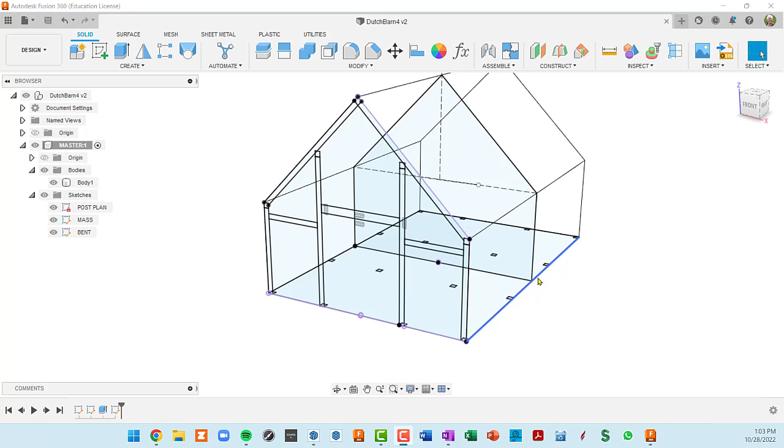We have a master component, and inside that master component is a single body, which is currently transparent because we set its appearance to air. And we also have three sketches. The one on the bottom here is a post plan. So that's where all our posts will exist. And this defines the outer dimension of the building. The second sketch we made in the center of the building and used to extrude this body right here. And then the third sketch was kind of an outline of the bent timbers, which we're about to draw.

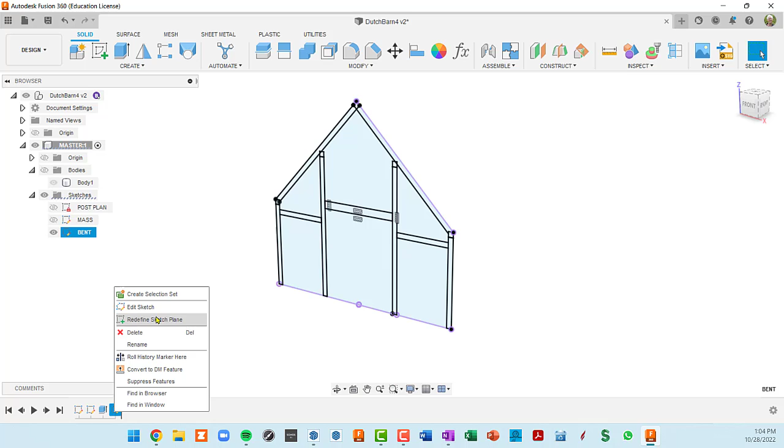Now, one thing I noticed when we did this last sketch, we did some projections, and that's what these purple lines are. If that bothers you, we can go back into the bent sketch, either by double-clicking here, or by finding it in the timeline, which is right here, and right-clicking and editing the sketch there. There's also a third way to do it. If you right-click on any element in the sketch, you can edit a sketch.

So I'm just going to go to the Sketch Palette dialog box, turn off the projected geometries, and for some reason this line drops out. So I'm going to get my line tool and then just draw this line back in, finish our sketch, and then we take a look at it from the front side, and that looks good.

Okay, so the very first thing we want to do here is create another component. So we have everything inside this master component. It's very convenient. We can hide it and show it. But we want to be able to do that for the first bent as well. So if I was to create a new component with the master component activated, which is what this little fisheye is right here, the new component would go inside or below this master component. That's not what I want. I want it on the same level.

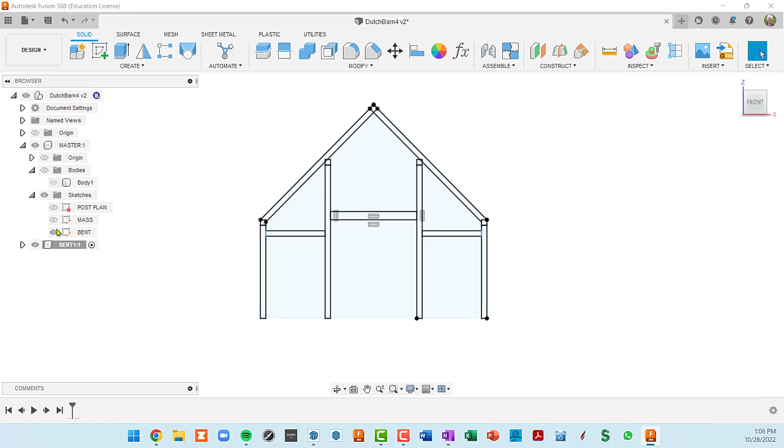So the very first thing I need to do is activate the top level component and then create a new component. So I will call this bent 1. All right, and now we can do sketches inside that, or even create other components inside that. So let's go ahead and show our post plan from the master component, and we can move around here, but our bent 1 is still active.

Okay, so what we're going to do is we're going to make some posts here. And I tell you what, let's also turn on our bent plan. Okay, so that's going to be a nice guide as to where all of our stuff is going to go. All right, so to extrude a post, all we have to do is select this profile and then use the extrude feature. So I'm going to click there. I'm going to go up to extrude. So when the dialog box pops up, it shows we've already got a profile selected. If I hadn't pre-selected that profile, or if I kill it now, I can go back in and select it.

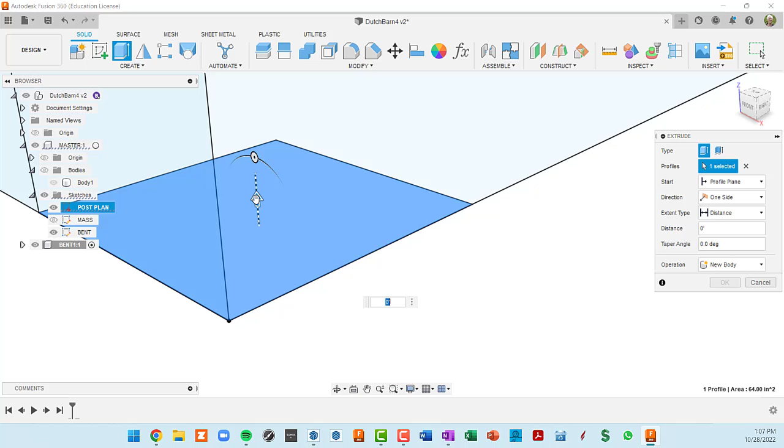Okay, so the arrow, the extrude arrow, is pointing upward. So if we pull that, we see the beginning of the extrusion. We want to be able to go up to this line. So if we pull this up, we can kind of see where we're at here. Unfortunately, I don't know of a way to snap to that line. You can snap to other bodies, but let's give it a try here. Let's see. If we don't set the distance, we want to go to an object instead of a distance. So will we be able to select this object? I don't see a way to do that.

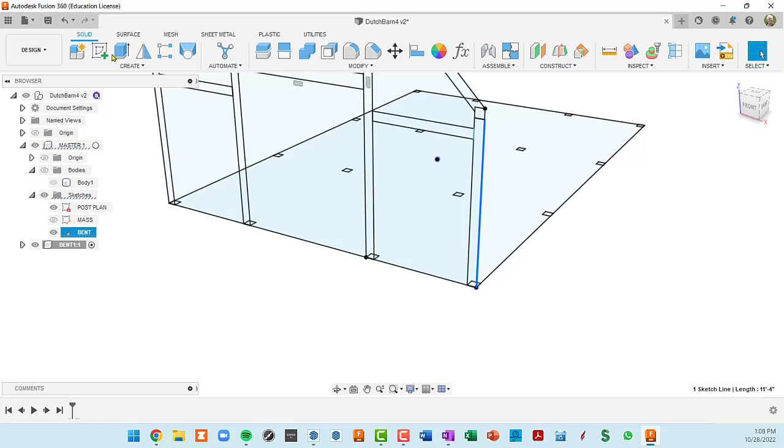Okay, but we do know our distance is the same as this line right here. So let's back out of the feature and let's just click on this edge line, and it says 11 feet 4 inches in the bottom right corner of our screen. So I will start up the extrude again. And I will select this profile and start pulling up. And then I know I need to go up 11 feet 4 inches and press enter. And there is a timber.

So let's go over to our browser and see what happened. So I'm going to collapse master and I'm going to expand bent 1. And right now we have a body inside bent 1. Now we could take this approach and make all of these timbers individual bodies inside this bent, but I actually want each one of these timbers to be a component. That will really aid us when we're doing our construction drawings.

So let's undo that. And let's do the extrusion one more time. And once again, select this profile. I'm going to pull it up. I'm going to do 11 foot 4 inches like last time. Oops, 11 foot 4 inches.

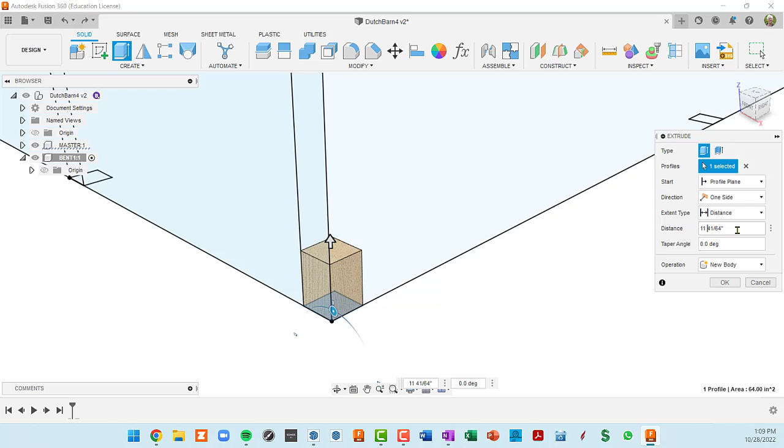Okay, now let me edit that. Still don't have it right. 11 foot 4 inches. Okay, that's right. Now, instead of the operation being a new body, I want the operation to be a new component. So I'm going to select new component.

And now when I OK, I still get the same body created, but it is now inside this new component. And it's automatically named by Fusion. And here's our body inside there. So first thing, now that the component, this first post is created, I'm going to click and second click. So you can't double click. You have to click, wait, and click a second time. I'm going to name that post 1A.

Now my numbering system, which is pretty typical, is that every timber in the first bent gets a 1 to it. So this is post 1, but this is in wall A. So 1A, this post here is going to be 1B, 1C, 1D. Okay, so post 1A component has been created, and now we activate it. And that, if we did any more sketches or what have you, we would be working inside there.

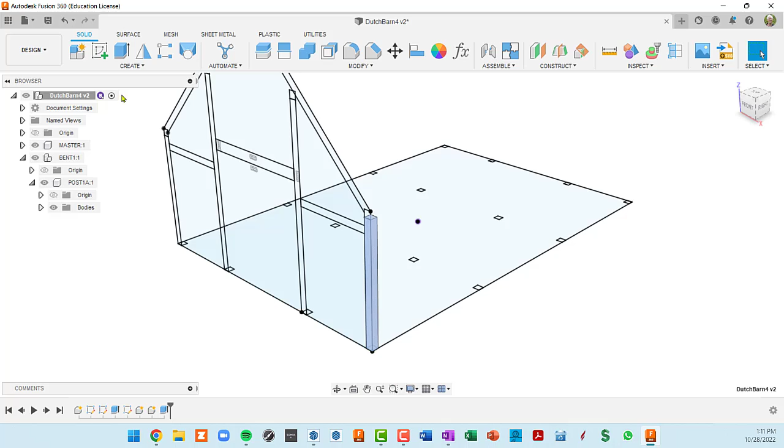Okay. Another reason to isolate and use multiple components like this is the timeline. Now we haven't gone into the timeline yet, but if I go up to the top level and activate that, you'll see we have 8 or 10 things in the timeline, different features. We can rewind the timeline and go back to when things were extruded or created. And each one of these down here is an icon that matches the feature up here in the toolbar. So this was the creation of a component. Here were 2 sketches. This was the extrusion for the mass model.

But things can be hidden over here too. So unless you specifically go in and show things like this body, you wouldn't see that body going away as you rewind the timeline. Now we will see it, and now we will see it created. But sometimes as you're scrubbing this timeline, you don't see anything happening. It's because your bodies or sketches have been hidden over here in the browser.

Okay, so my point was this timeline for the master component is going to have every operation in here, every sketch, every feature, and it's going to get really complicated. But when you activate a component, you'll see only the features of that component are in this simplified timeline. So that's another reason for sticking everything inside components.

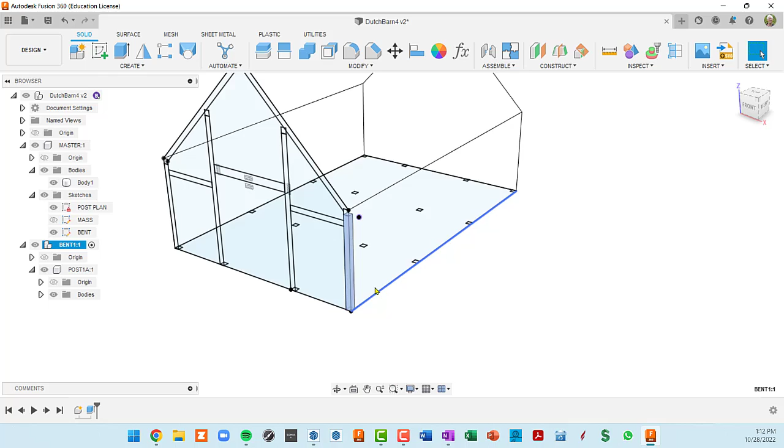Okay. Now, one of the interesting things in Fusion is you can go back in time and you can edit one of these features. And this is going to come in real handy in a minute when we start adding joinery to this. But let's go ahead and create our second post, and then I think we're going to start adding some joinery to those posts. Okay, so same thing as before.

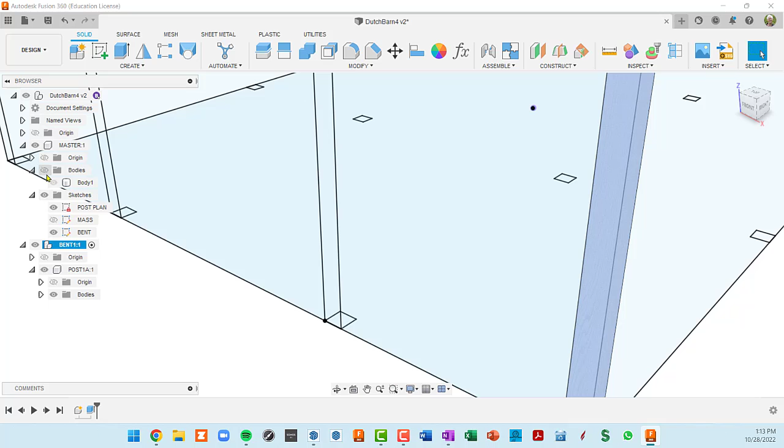We want to make sure we're in bent 1, and then we're going to do an extrusion of this profile down here. Actually, I want to hide this master body so that we can hover over this. Did I hide it? Yeah, so we can hover over this profile and pull this up. Okay, so we've got bent 1 as the active component. I'm going to collapse this tree so it's a little less busy. And let's go ahead and do another extrude. And we're going to select our profile, which is going to be this rectangle right here.

And let's see, one thing I didn't do, I want to get my dimension here first. So I'm going to cancel out of that. Click on this line, look down here and see that the post height is 11 foot 8 inches. Okay, great. All right, so let's do an extrude. First thing, we're going to select our profile, which is right here. We can go upward and 11 foot 8 inches and press enter.

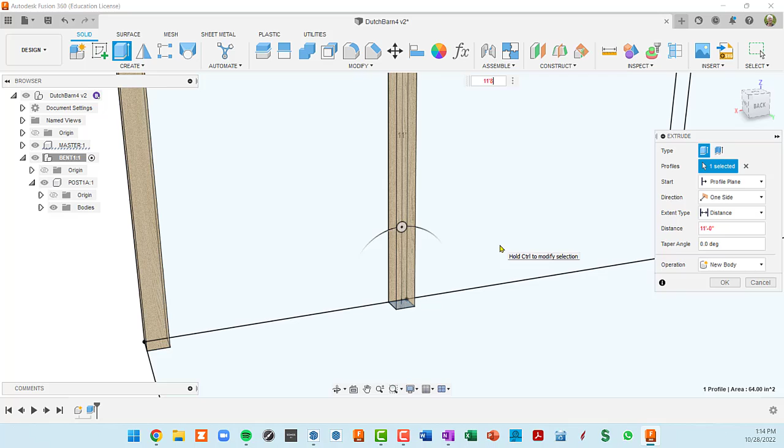Oh, that was not the right dimension. Let me click on here. Okay, it was 18 foot 8 inches, sorry. So now that I've done that extrusion, this is actually a good example. I can go into the timeline and right click and edit that feature.

And I can say, okay, that was supposed to be 18 feet 8 inches, and then press enter. So I didn't have to do a second extrusion. I essentially went back to the first extrusion and fixed it. So that's very handy, something that you can't do in SketchUp. You would have to do a second extrusion. Okay, so there is our second post.

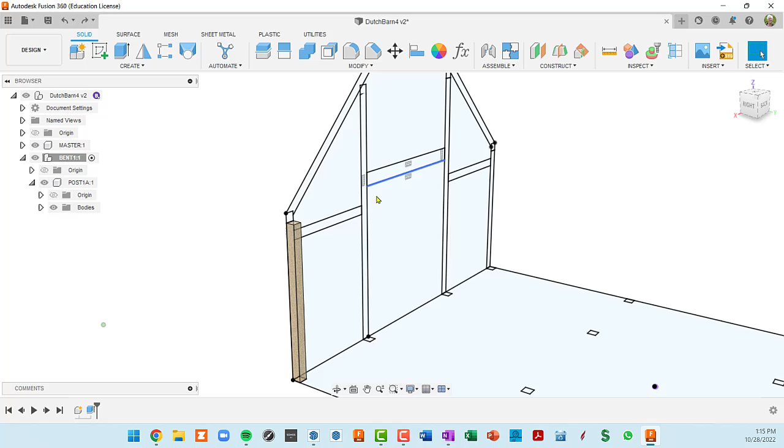Now let's go ahead and do some joinery. This square represents a plate that's going to sit on top of this post 1A. Well, you know what? Let me back up a second. I did that wrong again. So I'm going to undo that, undo the extrusion all the way, because I want to create a new component. I want to create post 1B. So another attempt at this extrusion.

I'm going to go to extrude. I'm going to select the profile. I'm going to go up and type in 18 foot 8 inches. And then I'm going to select a new component here. Okay, and then click OK. So here's our component. It's at the same level as our other post. I'm going to click a second time, and call this post 1B. So it's in bent 1, wall B.

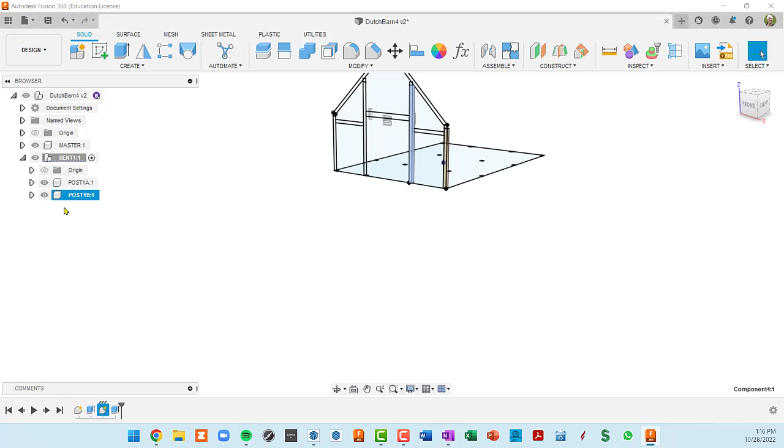Okay. So now we have our two posts, and I can hide. Well, at this point, let's go ahead and hide our master. And there's our two posts. There's post 1A and 1B. Okay, so with our sketches back on, we are actually going to extrude this post up an extra ½ inch because it's going to go into the housing of this plate, and the same thing here.

So in order to do that, we can go to each of these posts and activate a post. Here's the extrusion. Right click, edit the feature, and now we're going to add a ½ inch. So 18 foot 8 and 1/2 inch. That's going to pull that up into that plate so that it's properly housed, again using the square method of timber framing that's taught at Yestermorrow.

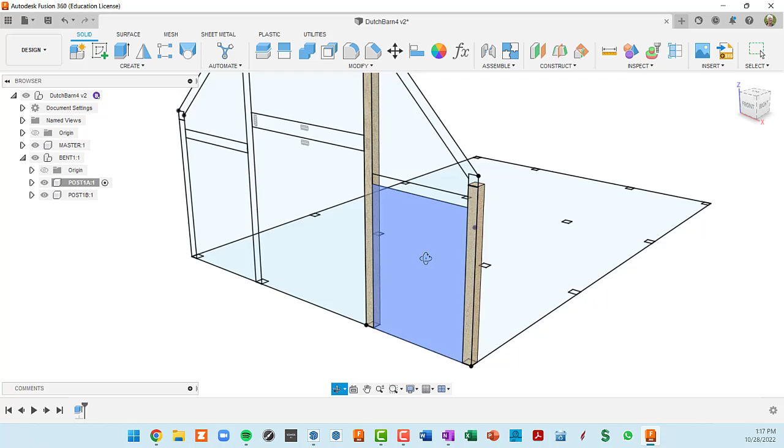And we will do the same with post 1B. We will activate that, go to its extrusion, right click on it in the timeline, go to edit feature, and change its extrusion value to 18 foot 8.5 inches. So we can see that that will eventually be cutting into this plate or beam that sits on top of the post. Okay, so let's go ahead and do the reduction on these posts.

So I'm going to start with post 1A, activate that, and I'm actually going to create a sketch inside there. That's why I activated it. So I think I'm going to pre-select this face of the timber and do my sketch. Okay, so what I'm seeing is actually both timbers here. So just to make it less confusing, I'm going to hide 1B, and then I'm going to go look at. So now we're looking at the side.

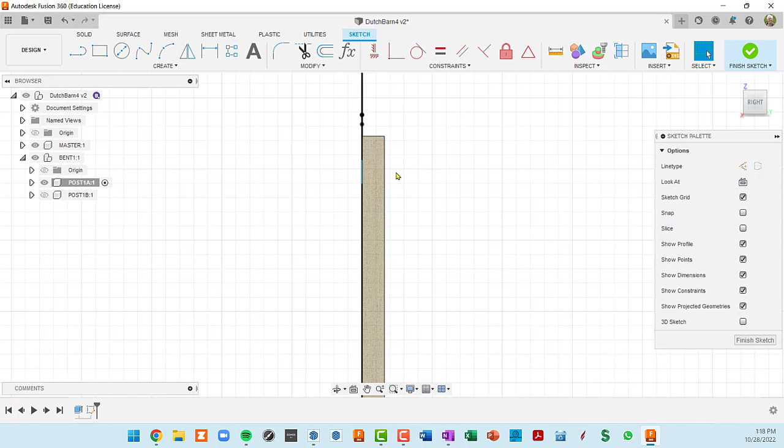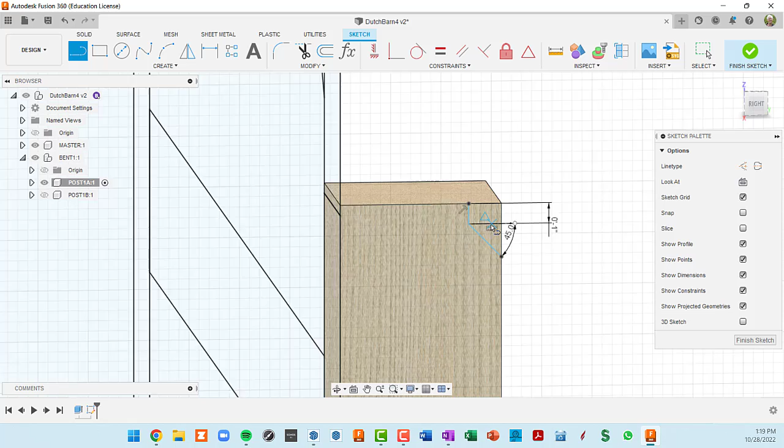And basically what I want to do here is get my line tool, and I am intersecting with the top of the post, coming straight down 1 inch, typing in 1, pressing enter. Okay, I can move my dimension over here. And then I'm going to hit L again, and this time I want a 45-degree angle for this reduction. So if I type in 45 here, and then make sure that it intersects here, I've got a second line. So now I should be able to hover over this and use that to cut away that area.

Okay, so those two lines are in my sketch. I'm going to finish the sketch, and I'm going to open up post 1A, and I'm actually going to label this sketch because we're going to have a couple of sketches in here. So I'm going to slow double click on that and call that reduction. Now, I'm going to go ahead and do the cut here just so you see what I'm doing. Again, I'm in post 1A, that's the active component.

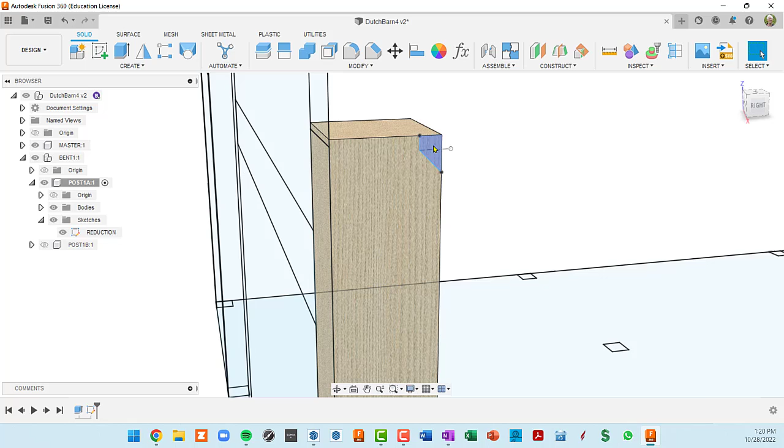I will click on this surface here and go to extrude. And this time, my operation is going to be a cut. And now when I start pushing this surface back, for the distance, I can just say all. So it's going to cut all the way through that timber. All right.

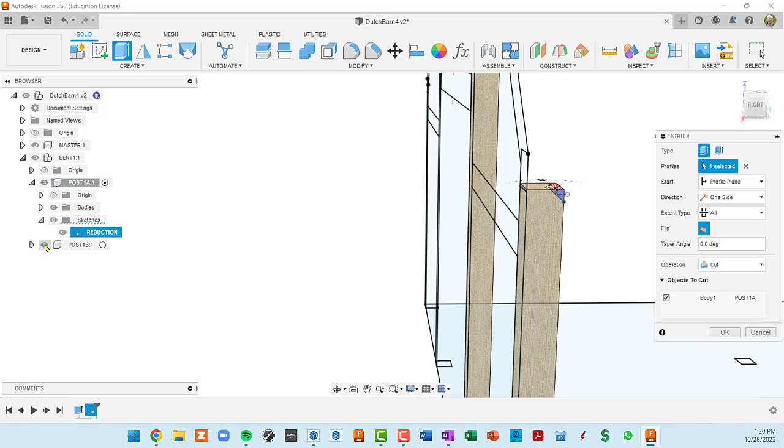Now, one thing to be aware of when you do an all is if you have other bodies that show up in the same plane, you do want to take a look and see which bodies it's cutting through. But as long as everything else is hidden, you don't have to worry about it. But if I had post 1B open here and I was doing a cut and viewing it this way, we might have to worry about whether we're cutting through two posts. But in this case, we didn't have it open, so I think we're good there.

All right, so I'm going to finalize this. So I have done this cut. And now we see in our timeline, we have the original extrude, then we did a sketch, and then we had that cut of the reduction. Okay, so let's do another sketch and actually do our first tenon.

So I actually want to do a sketch on this top surface here. So again, I'm in post 1A as the active component. I'm going to pre-select this surface. I'm going to go to create sketch. So we're looking straight down on it. We're seeing the reduction right here. So I'm going to hit R for rect, and I'm going to purposely intersect. Well, actually, I don't want to because that tenon doesn't go all the way through. So I'm going to do a rectangle here.

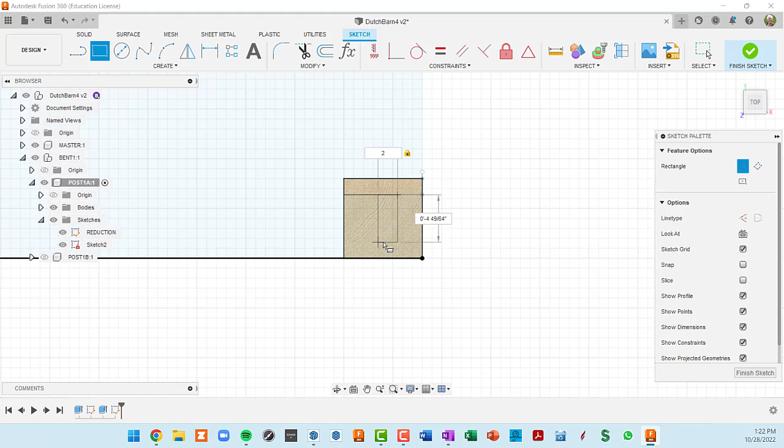All right, the first dimension is going to be 2, so it's a 2-inch wide tenon, and this one's going to be 4. Okay, so now we need another dimension in here. We need to know where is this tenon in relationship to the outside of the post, and it's going to be 2 inches in. Okay, so let's go ahead and finish our sketch and name the sketch. So this is the one we were working on. So I'm going to slow double click on that and call this tenon.

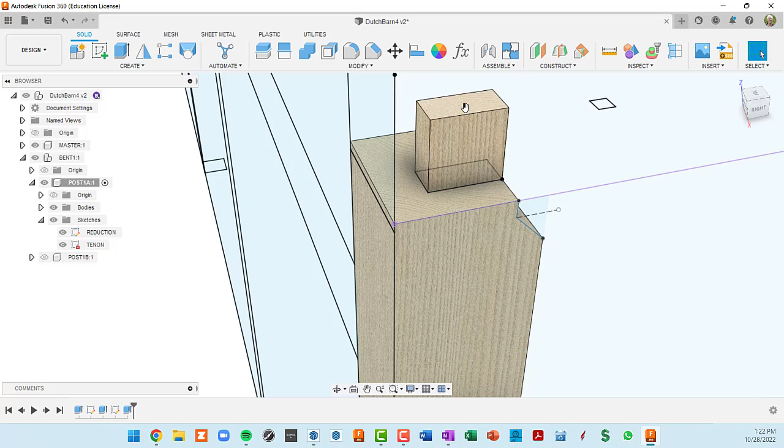Okay. So now I can click on that and do an E for extrude and pull this up. And let's say that tenon is 4 inches deep. Okay. So the reason I didn't go to the front of this post is that the mortise that is associated with this tenon would have cut all the way through our top plate. So generally you want some relish there, not cutting all the way through that plate. Okay, so that's our first tenon. It is 2 inches away from this edge. It's 4 inches tall and it's 2 inches wide.

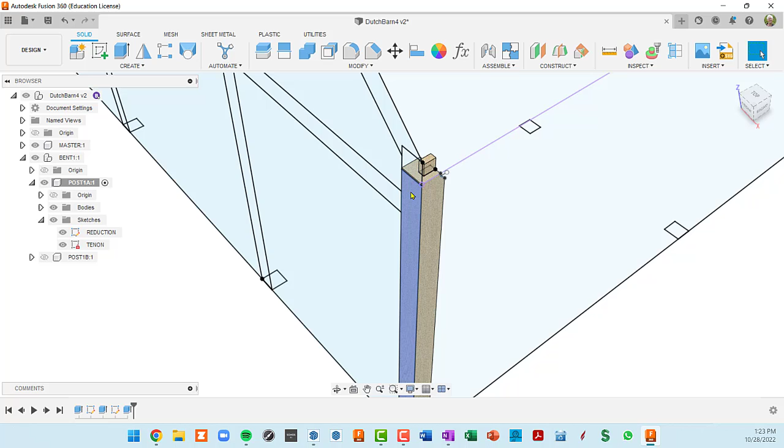So that timber is pretty much finished. We do have some other stuff that's going to happen in there, mortises. But we're not going to cut mortises until we get all of our timbers created with their tenons. Okay, so we're going to do the same operation that we did on post 1A in post 1B. So let's collapse post 1A, and let's activate post 1B, and let's show it, and then let's open it up. We can see right now all we have in there is a single body.

I'm not going to name these bodies. I don't name bodies or sketches if there's just one of them inside a component. It's kind of obvious what it is. That is the post body. But if there were multiples, for instance, in post 1A, we had multiple sketches. So in that case, I will name them. You don't have to, but that way you know what the things are if you want to go in and edit them. Okay, so we're now in post 1B. That's active. Okay, so you know what? I'm going to hide our master.

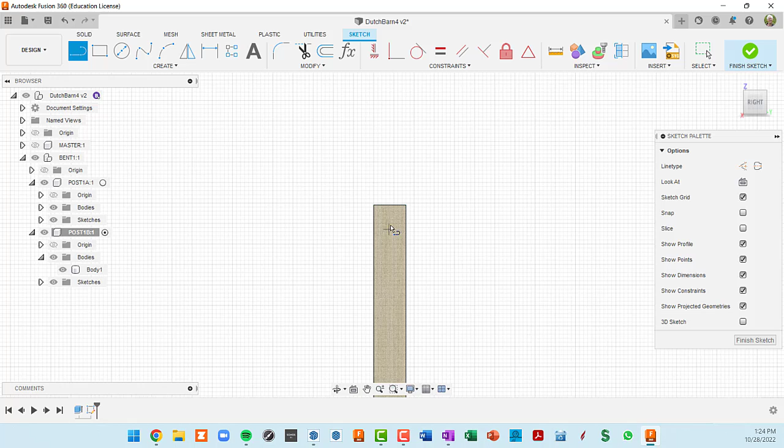And let's go ahead and do a sketch on this face. So I'm going to pre-select. I'm going to go up to create sketch, and then I'm going to hit L for line, intersect on this line right here, go down 1 inch, and press enter. So that's our 1 inch line. That's going to be the start of our reduction. Let's do a dimension here from here to here, and that's going to be 1/2 inch in from the edge. And then we're going to get another line. This line we wanted on a 45-degree angle. So we type in 45 there and make sure that it also intersects the side.

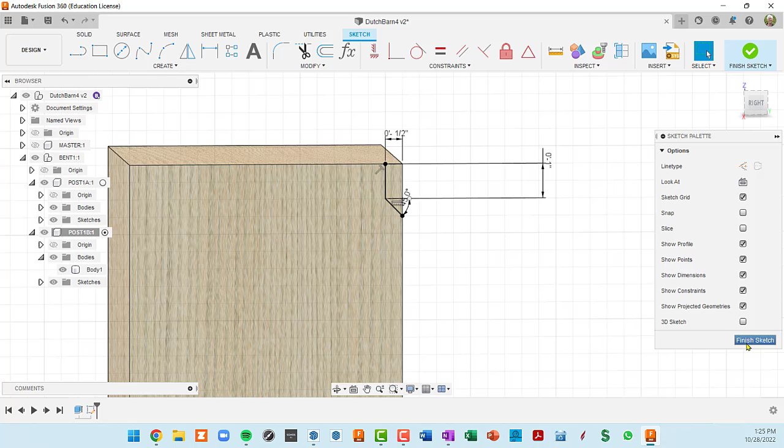Okay, that makes me think, I don't remember doing a 1/2 inch depth reduction on the other sketch. So this is a good example of how you can go back in time and change that sketch. But let me finish here first, and then we'll go fix the other one. Okay, so I think that's all we need for cutting the reduction. So let's finish the sketch. Now let's open up our sketches folder, and let's name that sketch. Same as in the other post. I'm going to name that reduction.

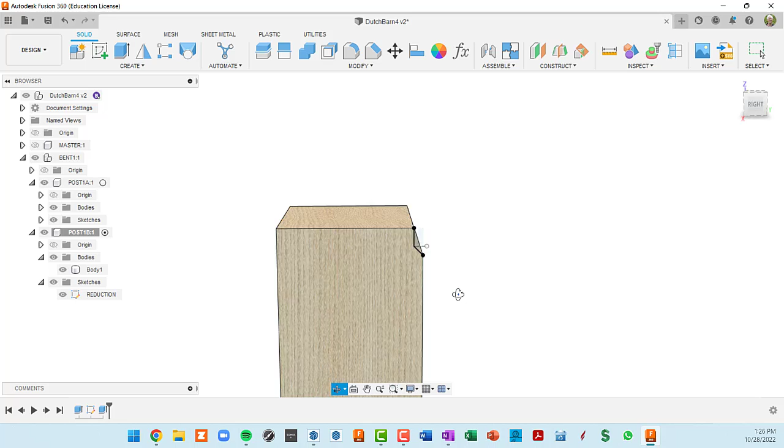Okay, so now I'm going to click on the profile, press E for extrude, start pushing this back. And now in this case, you can see that Fusion figures out that I want to do a cut just because of the way that I started to initially push that. So that's already preset. So all I really need to do is set the distance, which I could either type in 8 inches or I can do an all, either one. Okay, so the reduction has been cut. Now I want to do the tenon, same as last time. So that's the surface I want to sketch on. Create another sketch. And now I'm going to do a rectangle.

And you know what? That snapped to the center, so I'm going to hit escape. Let's get away from the center because that would have kept it on the center. So, okay, so now we've got this tenon is going to be 4 inches deep. Actually, that doesn't look deep enough, does it? Let's try 4.5. And this is going to be 2 inches.

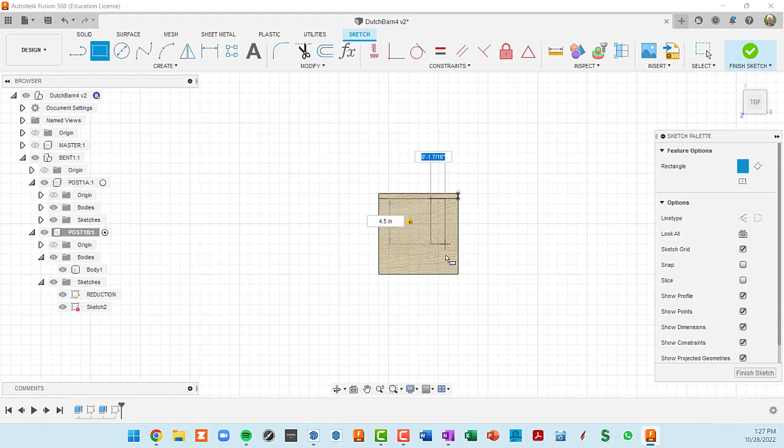Okay. So what I wanted was a distance from here to here of 2 inches. I've actually got 3 inches. So let me edit that dimension. So that's going to be 5.5 inches from that side. Okay. And this is 2 inches wide. And the tenon, if I get my dimension by pressing D, I'm going to set that to 2 inches.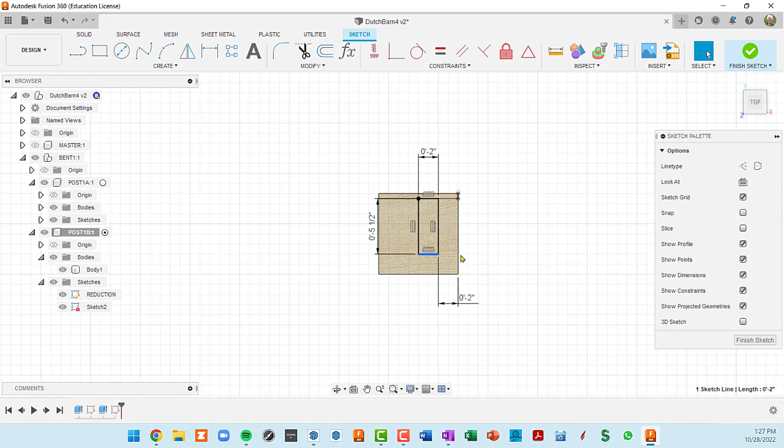Okay, so let's verify everything first here. If I click on that line, that's 5.5 inches. Click on this line, it's 2. I can see it's 2 inches from the face. So that should be fine. I'm going to click OK. I'm going to click on this, hit extrude, come up and type in 4 inches and press enter.

Now you can see the operation here is join. And again, that got set automatically by Fusion. I want this new thing that I'm creating joining this body. So that's what join is all about. Okay, so again, I'm going to rename this sketch the tenon.

And let's just look at the timeline of post 1B. Let's go back in time. So that's the extrusion of the tenon. This is the sketch of the tenon. If we go back another one, this is the cut of the reduction. This is the sketch for the reduction. And this is the original extrusion of the entire post.

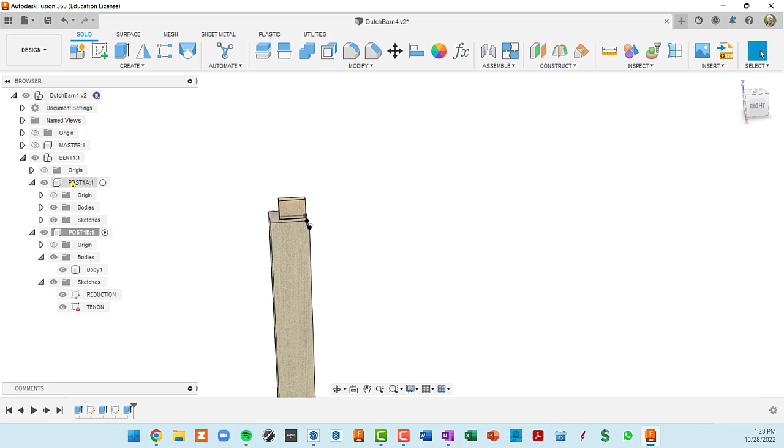Now, what I think I screwed up on is in post 1A, I'm not sure I positioned the reduction correctly. So not a problem. We can activate post 1A. I'm going to collapse post 1B. Let's hide post 1B too. So here's our post 1A. And yeah, I did a gigantic reduction here.

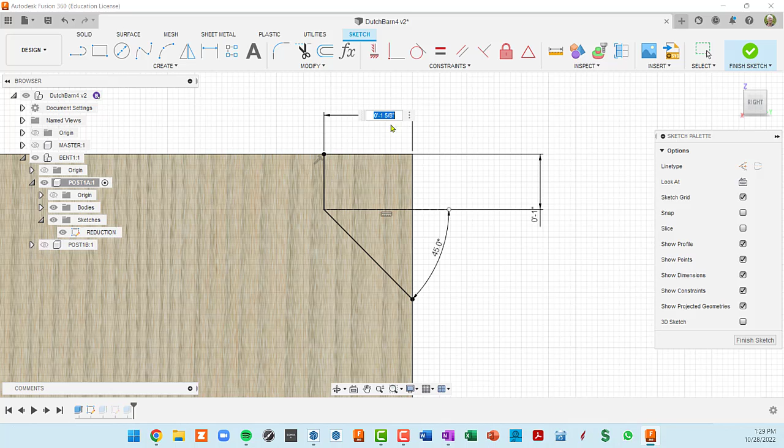So let's go back to that sketch. So in our tree, we can say, okay, here's our reduction sketch. I'm going to double click on it. That's going to open the sketch up. And now, yeah, I don't have a dimension going in this way. So I'm going to press D from here to here. We want that to be a 1/2 inch.

And you see how everything else automatically adjusted itself because it was fully constrained. This is still 1 inch. This is still at a 45-degree angle. So now the cool thing is when I finish this sketch, Fusion is essentially going to replay everything it did, and it did the extrusion.

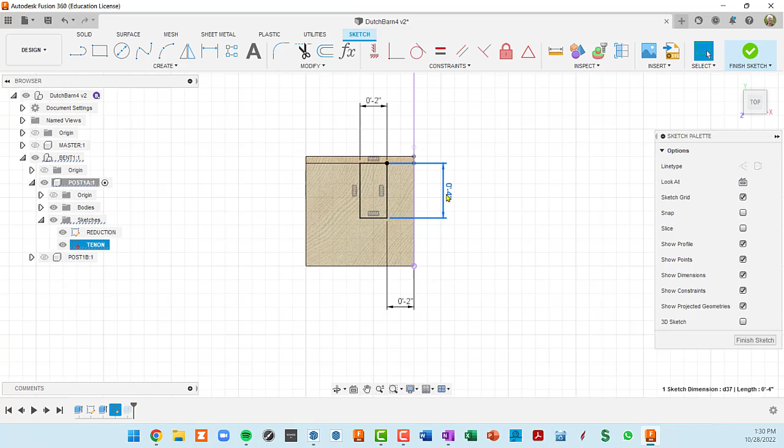Okay, so now the other thing that I got wrong was the depth of the tenon sketch. So let's go to this tenon sketch, right-click, edit is another way of getting in there. And I'm going to zoom out until I find it. And you can see that this 4 inches is not, that's supposed to be 5.5. So I'm going to double-click here, type in 5.5.

What I really want is a distance. If I do an inspect here, I'm going to press I for inspect and measure from here to here. What I really want is 2 inches, which is what I've got. So that's a better looking tenon. So I'm going to close the measurement and I will finish the sketch.

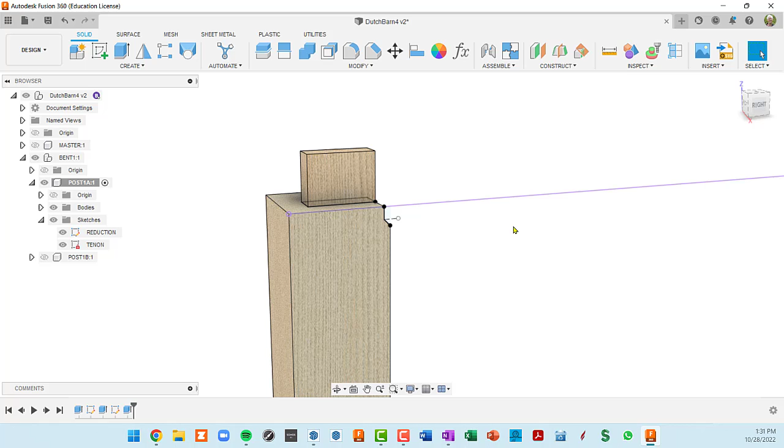And again, Fusion just replays everything in the timeline. So the extrusion is going to happen. I don't have to go back and do that. So it's very typical to realize you've screwed up a sketch, go back, fix the sketch, and if the sketch was used for an extrusion, that just happens automatically.

So let's take a look and see what we've got now. Let's show both posts. I'm not sure what this is, and you know, sometimes things happen in Fusion that you're not sure of. So what I'm going to do is right click on it and edit sketch. So this is the sketch that this line is in. It looks like it's a projection.

I don't want this, so I'm just going to click on it and finish the sketch, and everything's back to where we want. Now, one thing you notice is, you know, there's some extra jazz going on here. This is the sketch. So I want to go into post 1A, hide all the sketches, go into post 1B, and hide all the sketches.

And now it's a clean looking body where we're not seeing the sketches at the same time. So that is how to do the first two posts, post 1A and 1B, with their tenons done in the square method, where we have reductions and an extra half inch poking into the top plate.

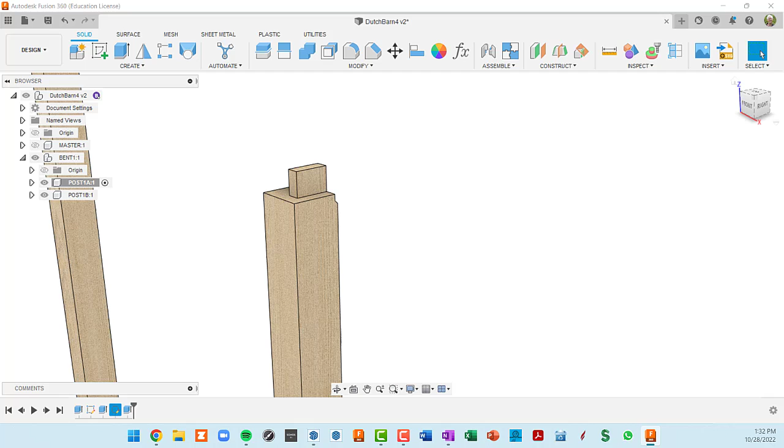So the next thing we're going to do is create the tie beam that ties these two posts together. Let's show our master component that's got our bent sketch in it, and you can see this is exactly where we want that timber to be. Since we have a profile right here in our sketch, we can conveniently use that and just push this thing back to get our timber.

Again, I want this body that we're going to extrude to be in its own component. We've been doing that in the extrude command, but I'm going to show you a different way to do it, kind of pre-making the component.

So we're going to go up to bent 1 and create a component inside bent 1, which will put it on the same level as these two posts. Create component, and I'm going to call this tie 1AB, so it's a tie in bent 1, and it spans from wall A to wall B. Okay, so now that shows up and it got activated, which is nice.

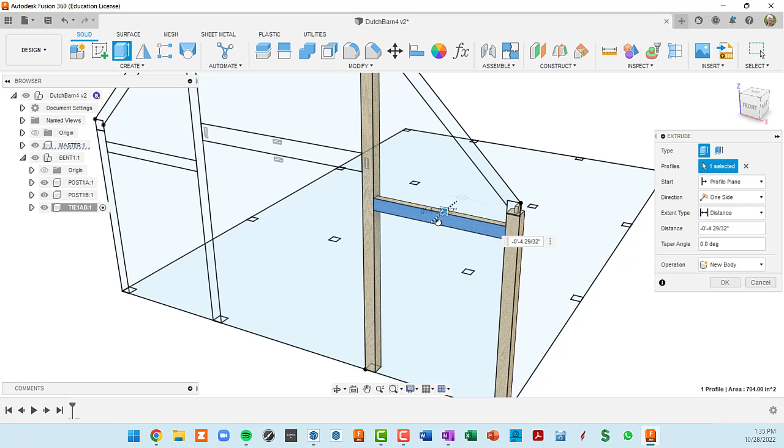So if we are to create a body right now using this profile, it's going to go into that component. Let's do that: E for extrude, I'm going to push this back. I know it's 8 inches, so I'm going to type in 8.

Now you see how it went the wrong way here, so I'm going to type in negative 8, and that gets it going in the right direction. It's really kind of arbitrary which way that initial arrow goes, and I didn't pay attention to that. But if you do pay attention, if you want to go in the direction of the arrow it's a positive value; if you want to go the opposite direction, it's a negative value.

Here I don't want to create a new component, I've already got the component. I want to create a new body inside the active component, so that's what we're going to get right now. If we open up that active component in the bodies folder, you can see we have made this body, and what's left behind is this sketch from the master component.

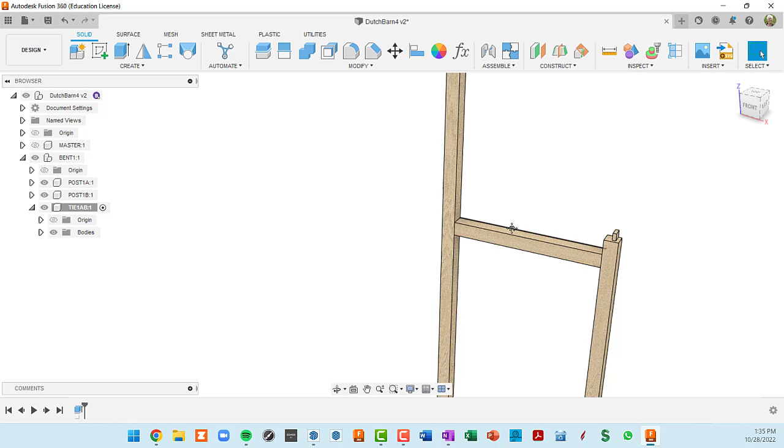Okay, great. Now I think we can go ahead and hide the master component. Again, with the square method, this beam right here is going to extrude a half inch into this post and a half inch into this post. So let's go ahead and do two quick extrudes without even doing a sketch.

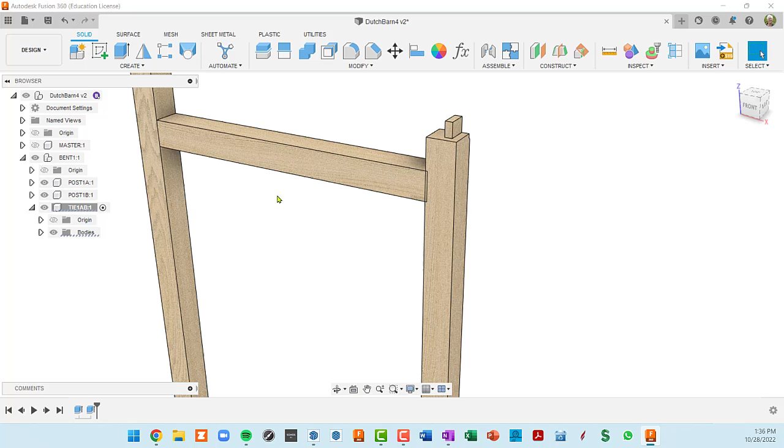Let's do that first. I think the easiest way is to hide post 1A. We are in tie beam 1AB. We're going to click on this surface, hit E for extrude, and just pull this and type in 0.5, so a half inch. If I show the post, you'll see what happened — we just extruded it a half inch into that post.

Now I'm going to come around the other side, hide post 1B, and do another extrude here, E for extrude, pull this and type in 0.5. Show that post — now we've got our extra length to that post.

And now we can do our reduction and our tenons. To do the reduction, again, we're in the proper component. Click on the face that you want to create the sketch on.

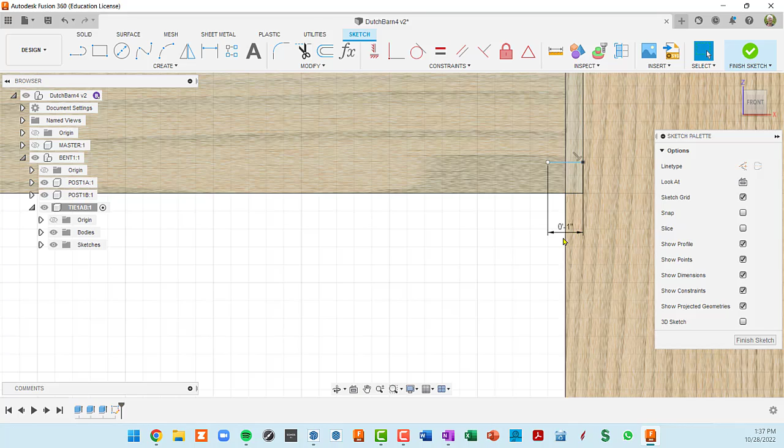Create a sketch. Now I'm going to go to this end and do a line here, making sure I'm intersecting with the end of the beam. This is going to be 1 inch long, and then it's also going to be a half inch away from the end here. I mean, really, in actuality, you should be measuring from this reference surface, and it would be 7.5.

So let me go ahead and do that. I'm going to hit D for dimension, click on this line, click on this line, and the dimension is really 7.5 from our reference edge, which is right here.

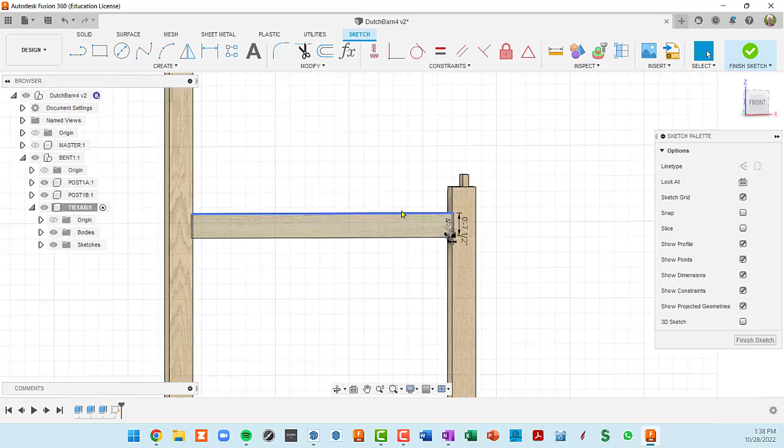Okay, L for line, I'm going to intersect here, tab to get 45 degrees, and make sure I intersect here, right there. Enter. Let me zoom out — I should have something I can hover over, and I'm not getting it.

I think I was a little sloppy when I was creating that line, so let me undo. One thing I have trouble with in Fusion is when I go into the line tool, if I act a little too quickly, I get a little mini line for some reason. So after that initial click, wait a second and then move. Okay, so I'm going to tab here — this is going to be 135 degrees.

Same as 45, but spinning around in a different direction. And then make sure I get intersected here. Okay, so now I get a fully constrained sketch.

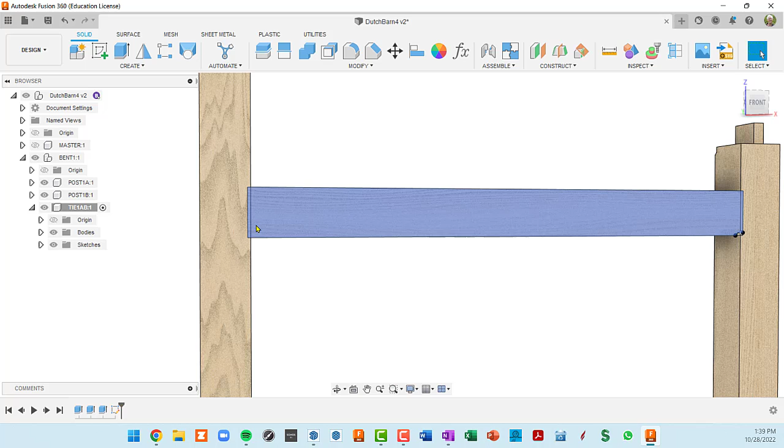It all went black. And when I finish this sketch, I can go ahead and hover over that. Now I've got that reduction over here, so I can put that in the same sketch. So we've finished the sketch.

I'm going to name it. I'm going to call it reduction, but I'm going to go back in and edit it.

So right click, edit sketch, and I've got these two little pieces of geometry. I'm going to create them over here. So I'm on this outside surface. I click, I go horizontal and type in 1 and enter.

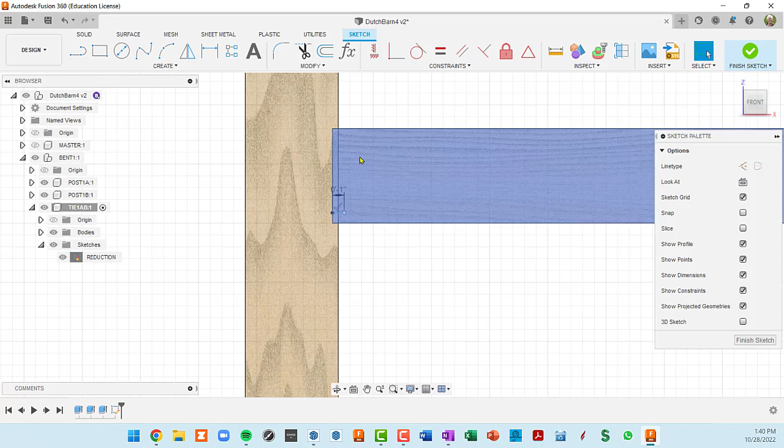And then I get my dimension from the top of the timber. So D for dimension, click on that line and this one, and this is going to be 7.5. And then L for line, click here, tab to my degrees, 45, and make sure that I'm intersecting here. And there's my fully constrained sketch.

Okay, so finish the sketch. Let's look at it straight on. And we can hide the body that we're working on and just see the sketches, or turn the body back on. Okay, so let's go ahead and hide the two posts.

And now we're going to cut the reductions. So we can do that in a single extrude. As long as your extrude is in the same body and it's going the same distance, you can select multiple profiles. So I'm going to hit E for extrude.

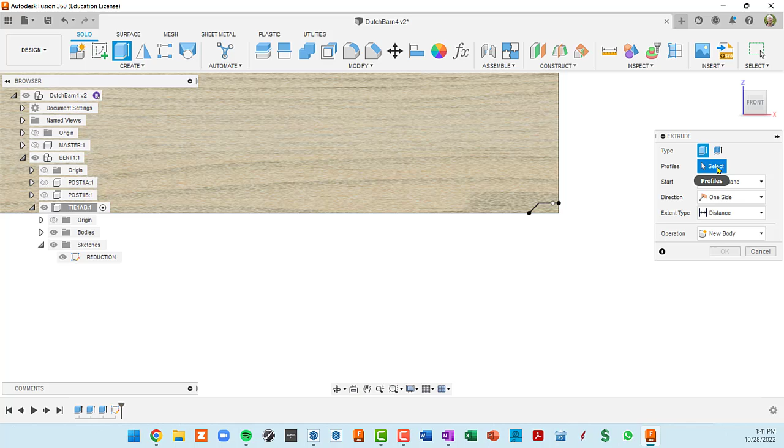And now when I select, you see it says one selected. I'm going to go to this other side and click here. And now in the dialog box, we see that there's two selected.

Now let's get on a slight angle here so that we can see our push-pull arrow. There it is, so it's going in the opposite direction. But if I go this way, Fusion figures out that it's a cut operation. And in this case, I can either put a distance of 8 or I can simply say all here, which I'll do. Okay, so now if we hide our sketches, you'll see we've got our tie beam reductions cut.

If we put our posts back in there, you can see how it looks. Okay, so the last thing we need to do is to do a tenon on each end.

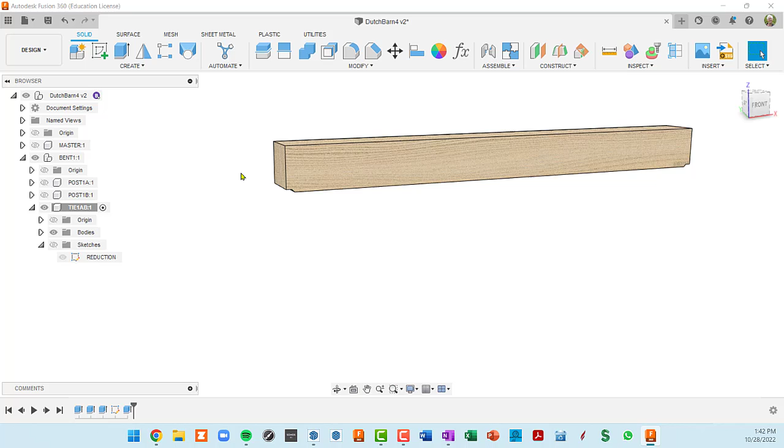So we're going to show our sketches, and we're going to create a sketch on one of these two ends. And then I'll show you a little shortcut way we can do the second sketch using projections.

So I'm going to pre-select this surface. I'm going to go to create sketch. We got oriented looking straight at that surface. And now I'm going to get a rectangle and go all the way from the top down to the reduction. Type in 2 inches here and enter.

Now we've got a couple of blue areas. Again, if you want to see what's going on, you can see how can I move this. I can't move it up and down, but I can move it side to side. So I need to fix the dimension here.

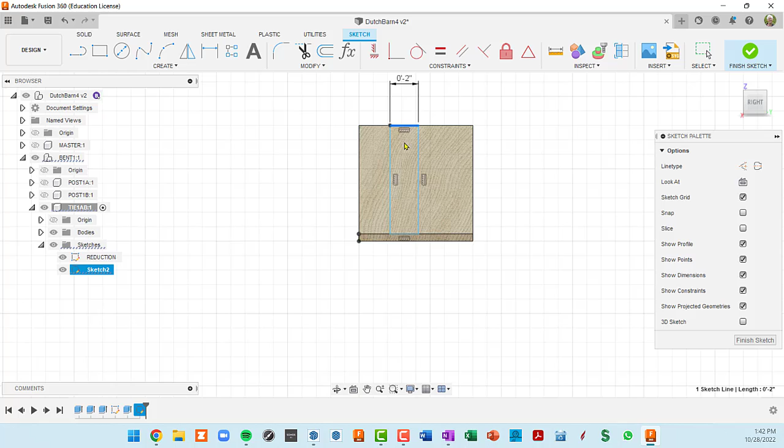So D, I'm going to click on the outside of the timber and click here, and I want that to be 2 inches. And now it all went black. So this didn't go black, so let's see. If we wanted to fully constrain this, I think it's a matter of putting this dimension into this 7.5 inches. Okay, so now it's fully black.

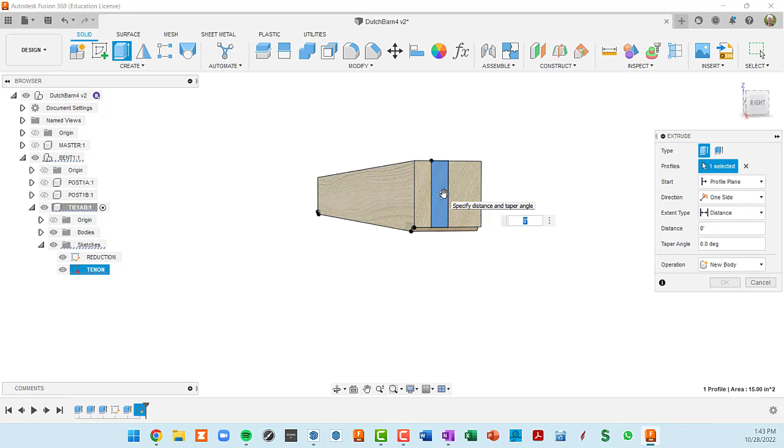And I'm in the sketch, so I'm going to finish it. I'm going to go name it in our browser. I'll name it tenon. And now I'm going to hover over the tenon, click on it, and extrude it. And I could make this tenon here, and that's going to be 4 inches.

Okay, so now I want to do the same thing on the other side. It's got the same tenon, and I have to draw the same sketch. Or do I? Well, since this is kind of a mirror image, I'm going to project this sketch over here. So I'm going to start and create a sketch.

And then I'm going to come back here and hit P for project. And now I can get these lines by just clicking on each one of these guys. And these 4 lines now are projected onto this surface. It's a little hard to see, but it's in purple there. So I'm going to click OK.

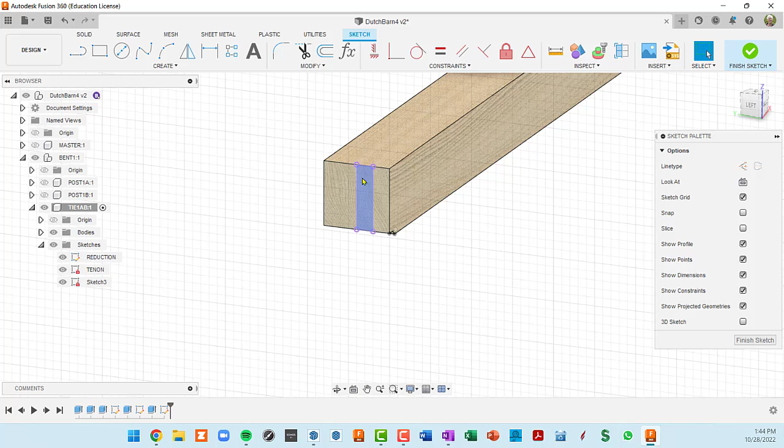And now I have essentially that same sketch that we did on this side of the timber projected over here. And you can see I'm ready to go. I can do my extrusion because I've got a closed profile. So I'm going to finish the sketch. I'm just going to call this tenon 2.

And then click on it, do an extrude, pull it out. This is set to join, which is what I want, 4 inches. Okay, so if we look straight at it, it's a little confusing seeing it with the sketches, so I'm going to hide the sketches. And there's our timber. This timber is almost finished.

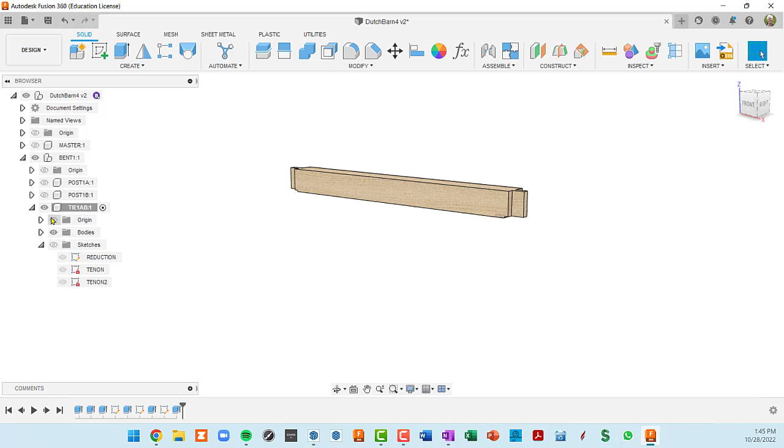All it needs are some mortises for the braces, but we're going to hold off on mortises until we get all of the timbers and all of the tenons done, and then I'll show you how quickly you can cut mortises. All right, so let's turn everything back on to see what we've got here.

So we've got a pretty good start. We've got 2 posts and the connecting timber. Now, you can mirror components as well as mirror geometry within a sketch, and that's what this is right here. So instead of having to draw all those components, I want to mirror image them. So let's try doing that.

So first thing is I'm going to go to my master sketch, and I can see what I need to do. I need to mirror these 3 components. I want to go up to bent number 1 and activate that. Let's collapse this, so we have 3. If I just click on these, you'll see them highlighted there in the design. We have 3 components inside the bent.

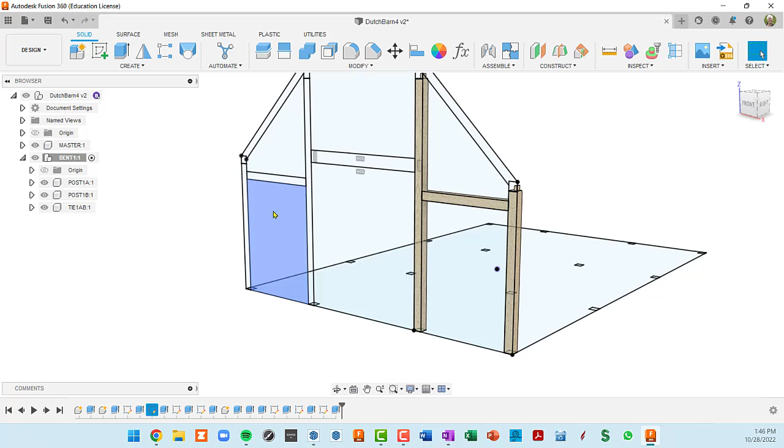We want to make 3 more components that are almost identical to these, but they're actually mirror images. The reason we did the tenons first here is that those tenons are also going to appear over here when we mirror image those posts. And the same thing with this tie beam.

So if we activate bent 1, we go up to mirror command. Now the mirror says, what do you want to mirror? Do you want to mirror bodies? No, we want to mirror components. Okay, so now I am selecting components. I can either do that in this browser tree, and you can see all 3 of those are selected, or I can kill this and actually click on the component.

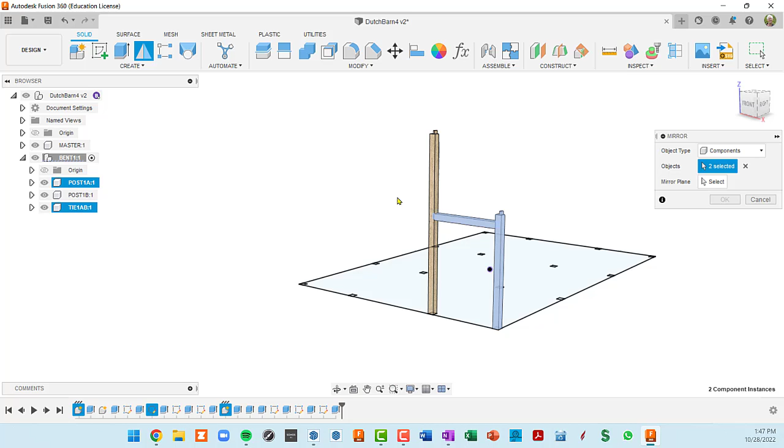Problem here is that this sketch is in the way, so I'm actually going to hide our bent sketch inside the master component. Okay, but we're still active in bent 1. So now I can select my components this way by just clicking on them. Either way, either selecting them in the tree or in the design space, you can see they're highlighted in both.

And now it's saying, okay, what's the mirror plane that you want to mirror these components about? So I go down and select that. And the nice thing is my origin actually pops up automatically. It was hidden, but it's temporarily unhidden while you do a mirror command, which is convenient. So I'm going to pick this plane. These planes are infinite, they go throughout the entire model. Even though it looks like it's just in the center of the building, this plane continues throughout entire 3D space.

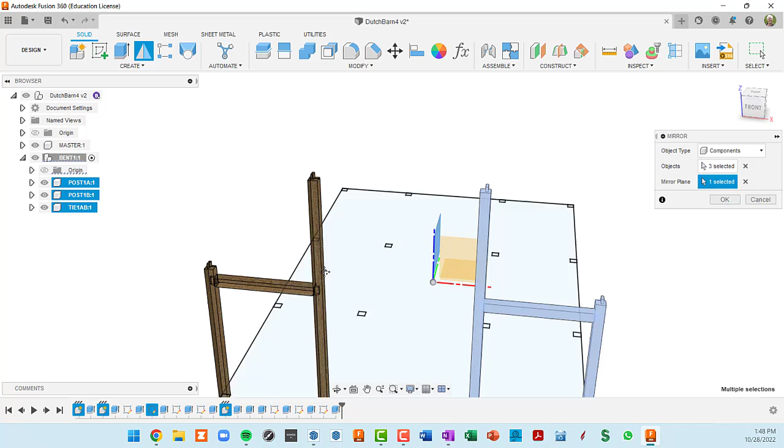So I'm going to click on that, and this is a preview of what we're going to get if we click OK - these 3 timbers over here. So that looks good, they're in the right position. They're the right height, and they're mirrored so that you see how the tenon is now on the outside and also on the outside here. So that's exactly what we want, and we're going to click OK.

And now let's see what we get over in our browser tree. We get post 1A mirror, and if I click on that, it's showing here. Post 1B mirror and tie 1AB mirror. So I can rename these guys and say, okay, this is going to be post 1C, and this one's going to be post 1D, and I'm going to rename the tie beam to tie, click on it a second time, to tie CD. So it went from wall C to wall D. Okay, so very quickly we created 3 more timbers.

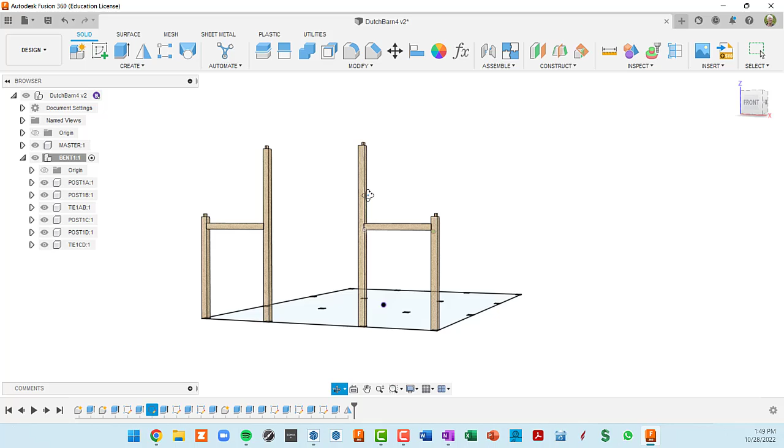That were mirror imaged from the first three. Okay, so we still have a tie beam to do, and then we'll be done with bent one except for braces. So let's go back to our master, and let's turn on the bent sketch, which is defining the position of this tie. And conveniently, we have a profile that we can extrude. So we're going to take the same approach as we did for the other tie beam. We're going to pre-make a component inside bent one.

Okay, so I'm going to create a component with bent one as the active component. So the new component is subordinate to that. And I'm going to call this tie 1, so it's in bent 1, and it goes from wall B to C. So tie 1BC. Okay, so here it is. It got created. There's nothing in it right now except for an origin, but it also got activated. Since it's activated, when I extrude this, that body is going to go inside that active component. So the distance of my extrude, now this is a negative extrude, so -8.

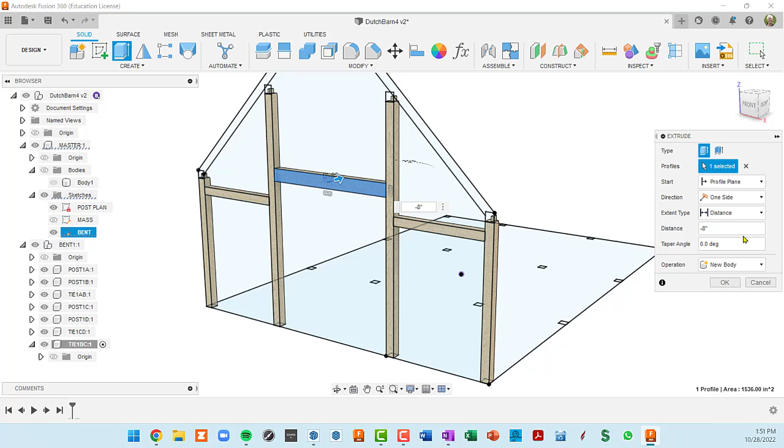Okay, so now we want to extrude it a 1/2 inch into both of the inner posts. So let's hide the two inner posts. So that's post 1B and 1C. We can get rid of our bent plan. Oops, post 1C I wanted to hide. Oh, okay, I named these wrong, so let's fix that. That's supposed to be post 1C. Let's see, what do I got going here? Yeah, post 1C is 1D and vice versa.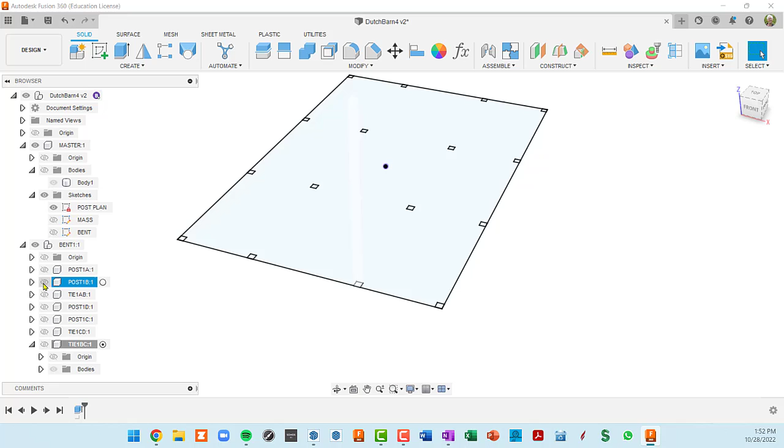So I'm going to have to name this post 1B. And then I can name this one post 1C. And then I can come back and name this post 1D. Okay, so let's make sure we got it right here. I'm going to hide everything except for the one post at a time. So we've got post 1A, that's correct, post 1B, post 1C, and post 1D. Okay, great. So I just wanted to hide the inner two posts, 1B and C. We can leave the outer two on there, and we can leave the two tie beams that we already have, oh, and the third tie beam.

Now, we want to do 2 quick extrudes, one here and one on the opposite side. So this is our active component, the one we're working on. So I'm going to do an extrude, arrows going in the proper direction. So I type in 0.5 and come around here, click on that, do an E, pull that back. Again, this is set to join, 0.5 here. Let's turn on our posts and make sure the extrudes happen in the right way. So 1C and 1B go back on, zoom in, and we can see we're cutting a 1/2 inch into the two inner posts.

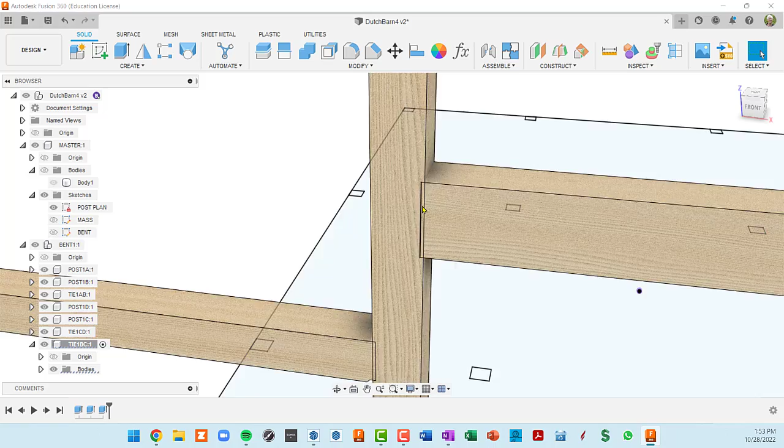Okay, so very similar to what we did on this tie beam. We're going to do the reduction sketch. So let's clean up our browser a little bit. So here's our active component. We are going to make a sketch within there. So we're going to pre-select the face we want the sketch to be on, create the sketch, and then make a line, intersect the outside. Actually, it's going to be easier if we hide those two inner posts. So 1B and 1C are going to be hidden. And we're going to come in here 1 inch.

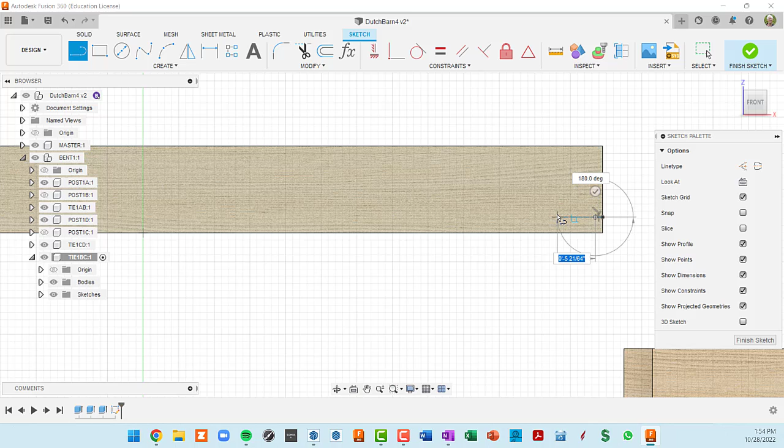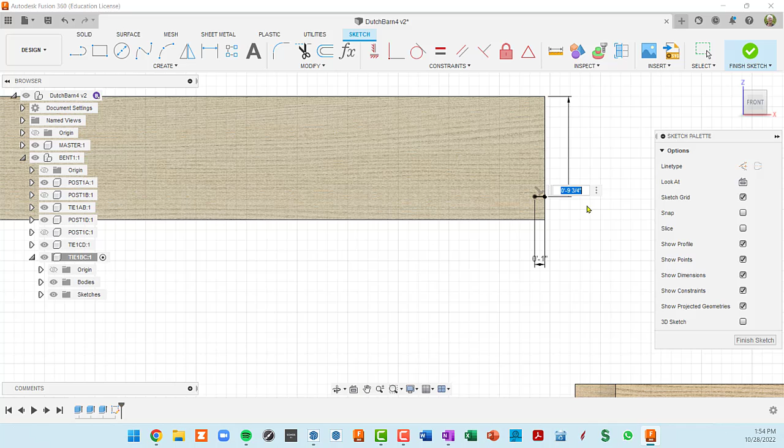See, I kind of screwed that up somehow. I'm going to undo that. Again, if you're a little too quick with the line tool, funny things happen. So I undid, so I have to redo my hiding. All right, L for line, click and wait a second, and then come in 1 inch. Now this is going to be measured down from the top, a 1/2 inch less than the height of this timber. The height of this timber is 12. So if I get my dimension tool and go from here to here and click, I want this to be 11.5.

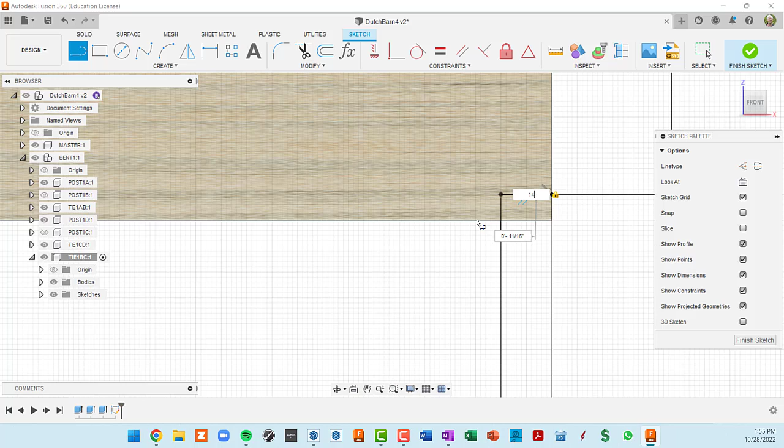And then L for line, intersect here, set our angle to 135, and then get our line. Oh, this was set to 13. Let me undo that. All right, starting again, L for line, click, oops, we're still creating that line. Okay, I escaped out of there. L for line, click there, and tab 145. No, it's 135, right? 135, that looks better. That's locked in, and then we can intersect that edge. Okay, so essentially a 45-degree angle.

Okay, now let me show you something. I'm not going to redraw this over on the other side, even though I need a sketch over there to do the extrusion. Since this timber is right in the middle of the building, why not use a mirror plane to mirror it over? So I go to my sketch mirror command, and it's saying select your object.

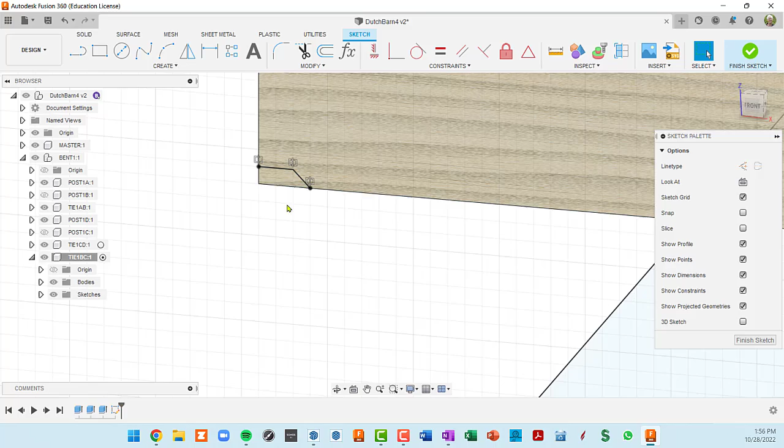So I'm going to click and click. Those are the two lines that I want to mirror. Then I click here. That's going to allow me to select my mirror line. And I need to show the origin. So I show it, pick that, and click on OK. And we're still in the sketch, but now over on this side, we have a mirrored, two-line sketch.

Okay, so we can finish the sketch now. We have what we need to do the extrusion. And we might as well name the sketch. This is the one we were working on. So click again, call this reduction.

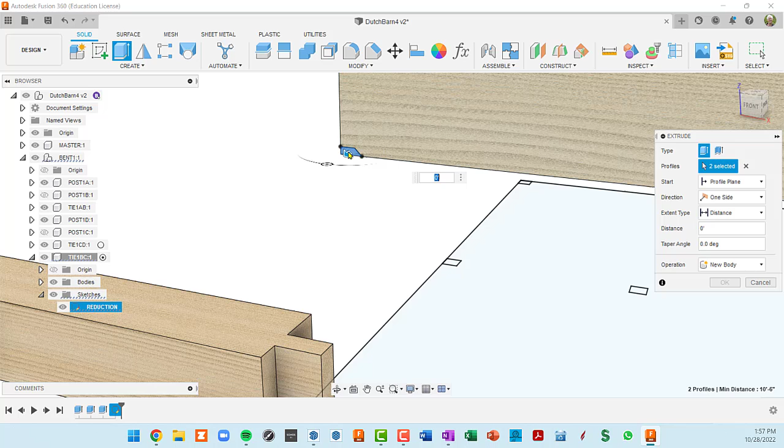Okay, so now I'm going to do an E for extrude, and I'm going to pick two profiles. Now you see here that the arrow is coming towards me, just arbitrarily selected by Fusion. So this would be a negative extrude. And here as well. And now I'm going to push it in the opposite direction. So I can either type in -8, or I can do a distance of all. And it's automatically selected for a cut operation. Okay. All right, so we are 2 tenons away from completion here of all the timbers in the first bent.

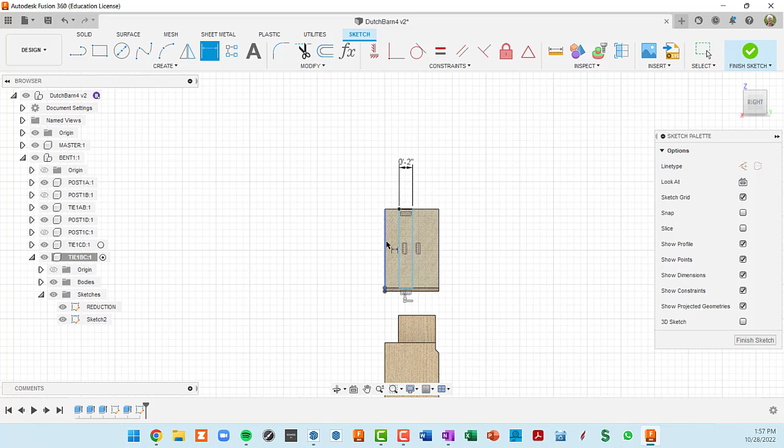So I'm going to click here, make a sketch, and get my rectangle tool by pressing R. Intersect here, tab there and make that 2 inches, and then hit D for dimension, click here and here, pull this up, and that's going to be 2 inches. So that is ready to go. Finish the sketch, name it, tenon, extrude it, E, select this profile, pull it back.

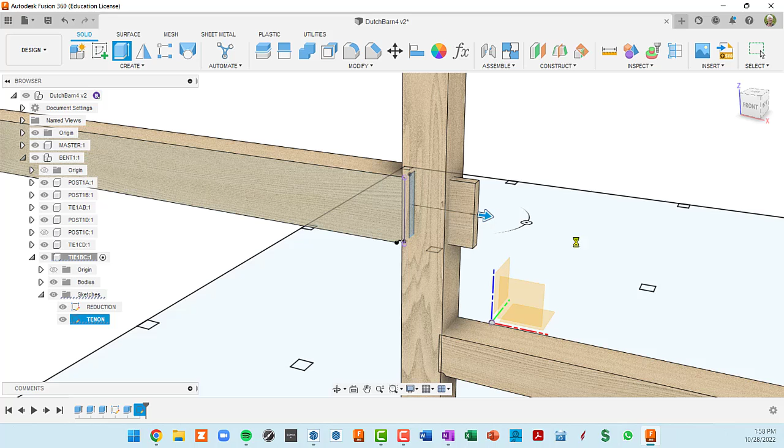Now in this case, this is going to be a through tenon. So this is going to come through the post. So while we're in this extrude, we can go up here and say, all right, we want post 1B to be visible. And we can see that tenon coming through. So it's kind of a judgment, how far do you want to go? I would say even 12 inches gives us plenty here. So I'm going to type in 12 right here and hit enter. Okay, so there's our through tenon.

Now we want to do the same thing on the other side, but we're going to project the other sketch, or we can even project this geometry right here. So let me show you how to do that. We are still in tie 1BC, our inner tie. We're going to pre-select a surface, create a sketch, hit P for project, spin around here, and just kind of hover over this center. Let's see if we can get the whole thing. Okay, so it says one thing projected. Let's come around here. That's not what I want. So I'm going to kill that.

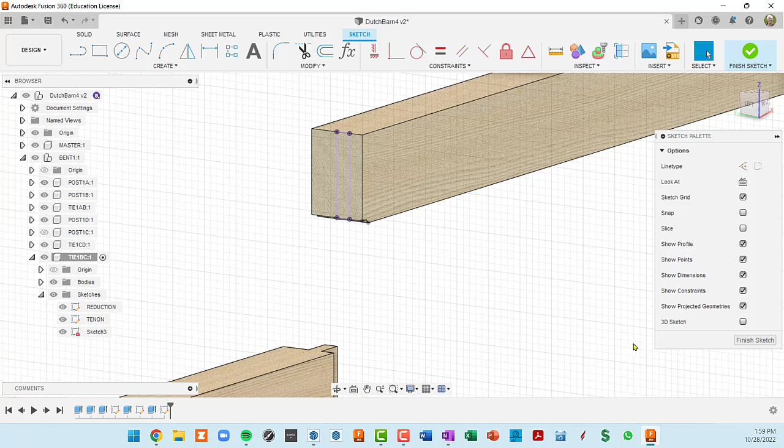I'm going to say, all right, I want this line, this line, this line, and this line. And I've got 4 selected in the dialog box. So now when I come around to the sketch plane, I should see it. It's kind of faint, but I see purple lines there. So I click OK. And now those purple lines are projected, but they're still in the sketch that we're creating. So I'm done. I'm going to finish the sketch, and I'm going to rename it to tenon 2, our opposite side tenon.

Hit enter, and now I know that I want to extrude this, so I click on the profile, press E for extrude, pull this, type in 12, and let's go ahead and show post 1C. Oh, post, there it is, post 1C. All right. And let's go ahead and hide sketches. And so let's do a little cleanup here. We've got all the timbers defined that we want, but we've got some extra stuff showing.

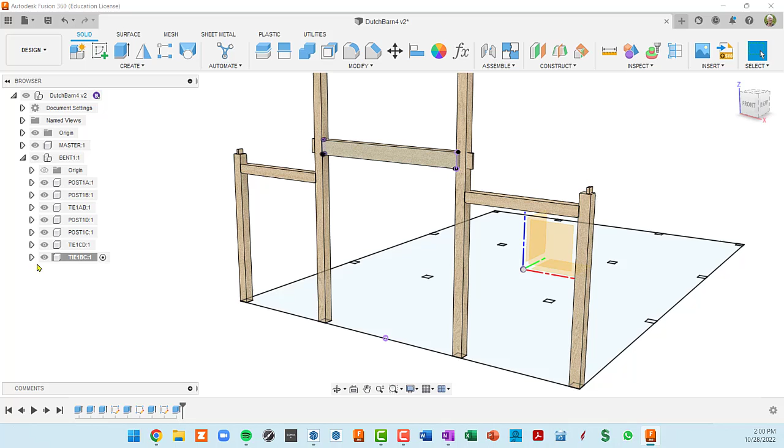So how do you find sketches that you want to hide is the question. And there's a very easy way to do that. If you see some sketch geometry here like this, I can click on it, and when I go over to the browser, I'm seeing a little squiggle line here. So if I open that up, I'm seeing a squiggle line here in sketches, and I can see, okay, I'm going to hide all those sketches. Great. So I didn't have to explore through the browser to find that.

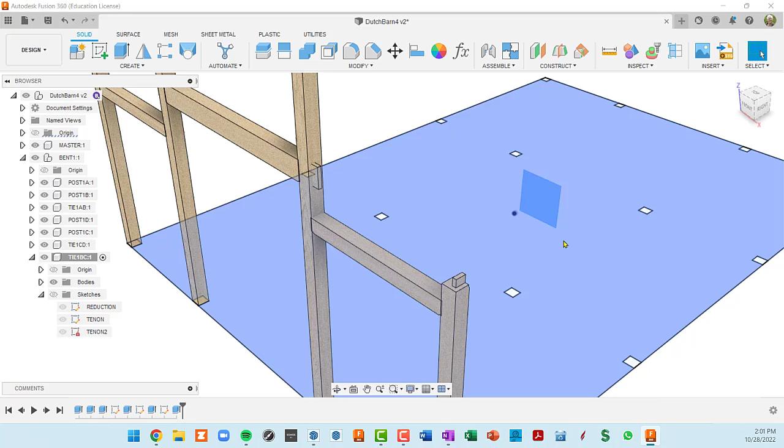Same thing here. It's like I've got an origin showing. If I click on that and come over here, I can see, oh, that's what that is. So I'll just hide it. And again, since I had it selected, it leaves this selection behind. So I'm just going to click outside of it. All right. So we've got 4 posts and 3 ties. So that's going to be the end of this video. In the next video, we're going to come put braces on this and then do all of our mortises.